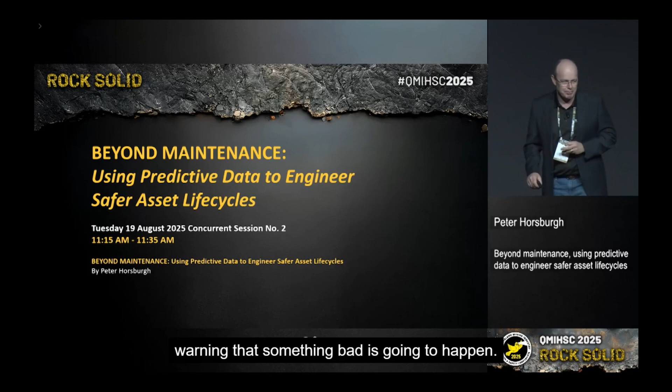So I want to introduce you to a future. In fact, this future is here now, and I've already chatted to a couple of people in the room. They've actually got the tools that I'm going to talk about here today. So imagine a future that gives you warning time. Warning that something bad is going to happen, okay? So

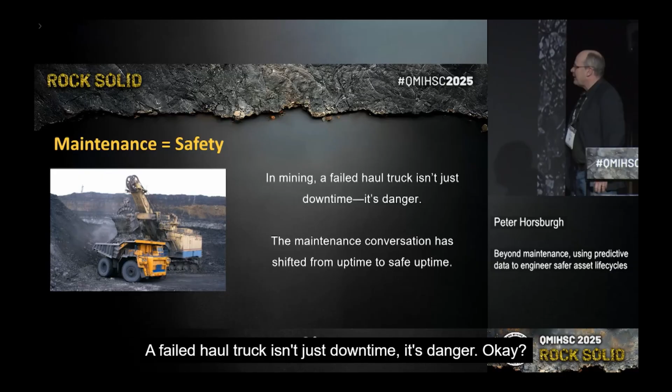maintenance is equal to safety in our language. Me being in reliability, there's certain things that can happen when things break that put our people at risk. A failed haul truck isn't just downtime, it's danger, okay? The maintenance conversation has shifted from uptime to safe uptime.

And I'm a big fan of Ron Moore. Does anyone know Ron Moore? Has anyone heard of Ron Moore? He's like an international speaker on reliability, okay? And Trevor mentioned my book there earlier.

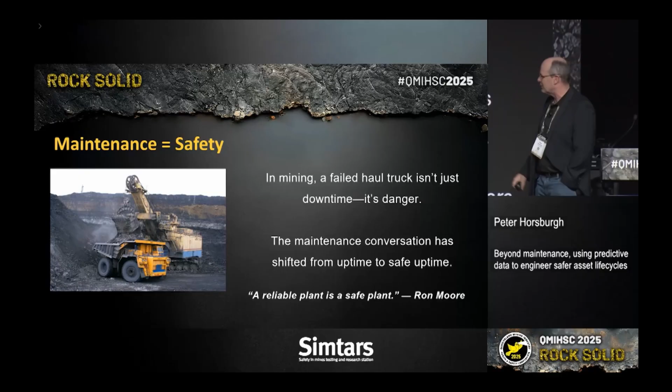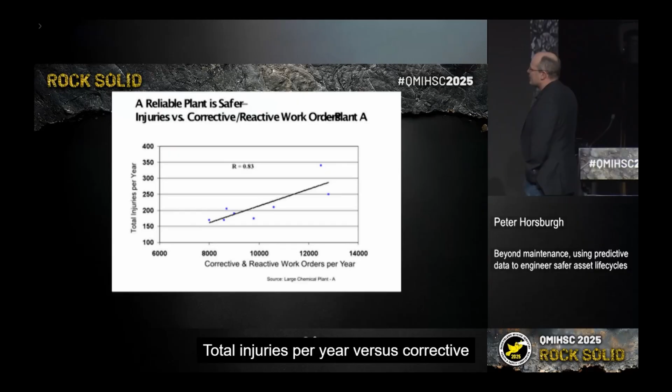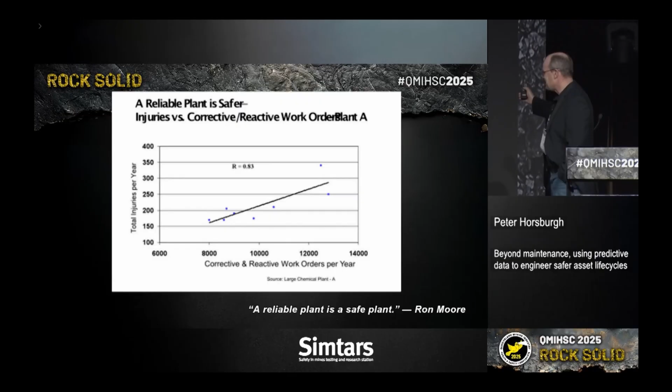A reliable plant is a safe plant, and he's actually done some data on this. Total injuries per year versus corrective and reactive work orders, okay? There is a 0.83 correlation between that. Okay, so if we get reliability and maintenance right, we're going to have a safer plant. There's the data to show it. A reliable plant is a safe plant.

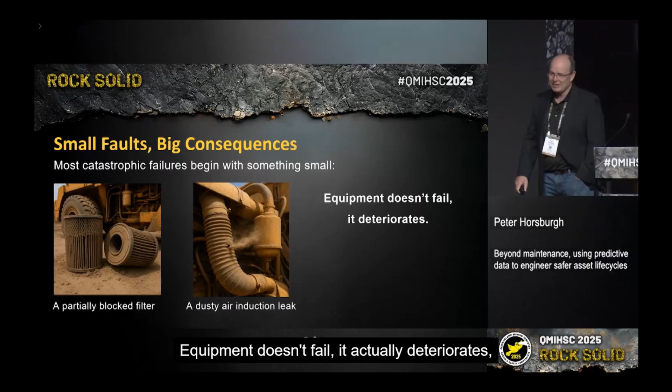Small faults, big consequences. Most catastrophic failures begin with something small. A partially blocked filter, a dusty air induction leak. Okay, take note of that. I'm going to talk about this in a little bit more detail in a second. Equipment doesn't fail, it actually deteriorates. It generally gives some symptoms, okay, some symptoms that it's going to fail.

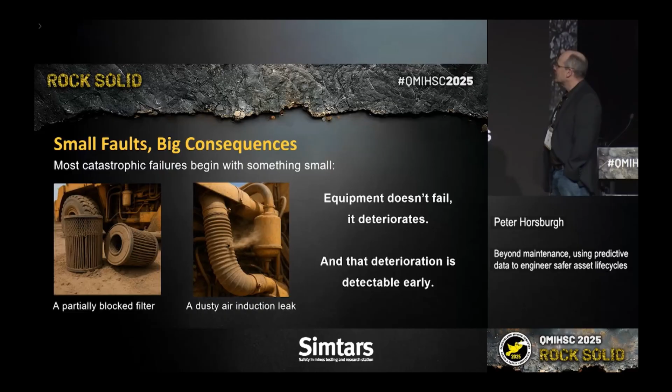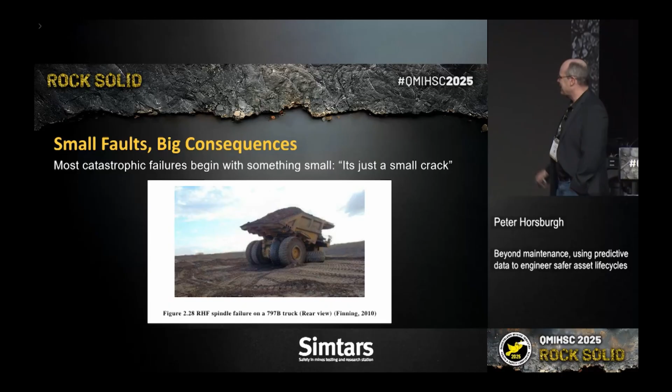This one here, I don't know if you know this one, but we had a right-hand side spindle failure on a Cat 797B. And again, it comes back to the point that most catastrophic failures begin with something small. It's just a small crack, okay? And it led to this here. True story, by the way. I found that in an academic paper.

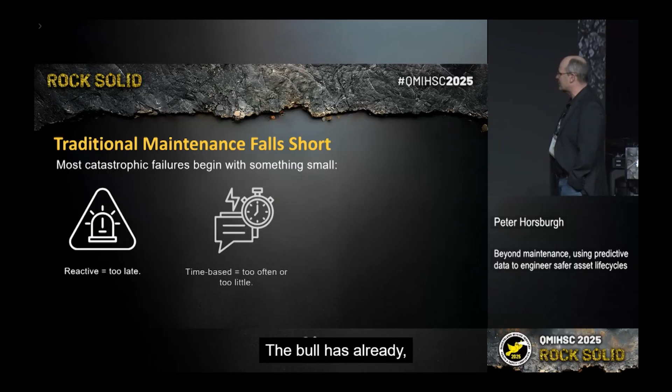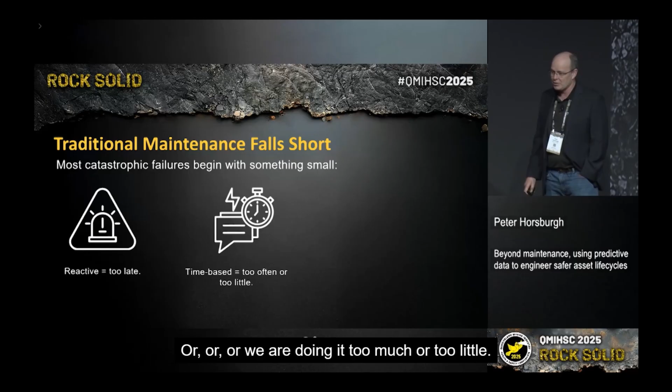Traditional maintenance falls short. Most catastrophic failures begin with something small. Reactive, it's too late. So if you're fixing the equipment on the run, you're too late. The bull has already broken the gates. Time-based is often too often, or we're doing it too much or too little. We miss stuff, okay? Both approaches miss the early warnings, okay?

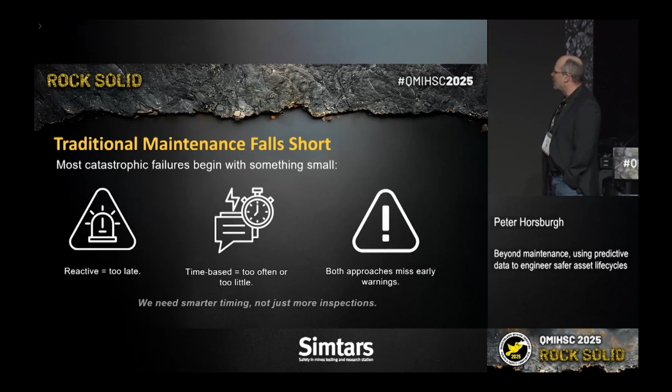And that's what this is all about, giving you good people time to react to a problem. Time to react to a problem. I think Maverick said time is your greatest enemy in Top Gun. So we want that time. We need something smarter and more than just inspections, okay?

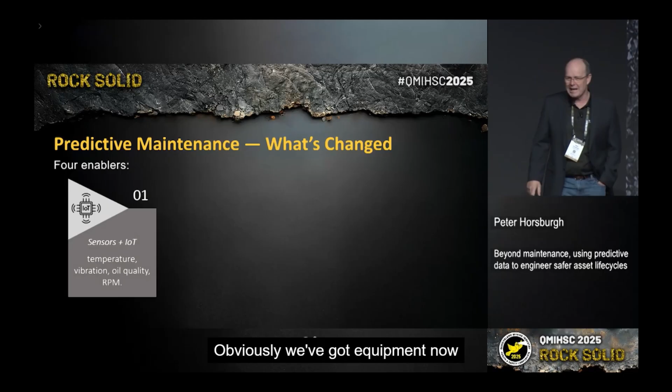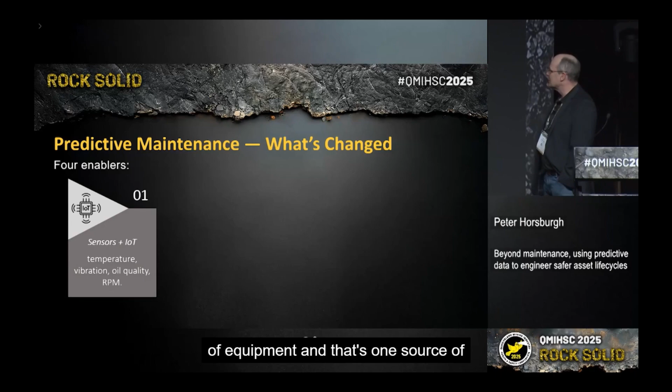So with predictive maintenance these days, what has changed? There's a few, let's call them buzz things, that I'm about to mention. Sensors and IoT: obviously we've got equipment now that is more electronic than it ever has been, okay? We can get all sorts of data off these pieces of equipment, and that's one source where we can get the symptoms from. Machine learning, which I'm going to talk about in more detail in this presentation, detects deviations from normal, okay?

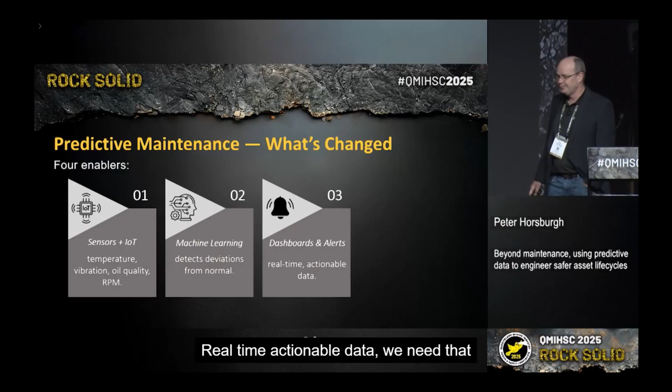Imagine training someone that sits there 24/7, 7 days a week, 365 days a year. You don't have to feed them. And they're constantly monitoring and looking for abnormal behaviour on your equipment. I'm going to give you some insights into how this actually works. Dashboards and alerts, okay, real-time, actionable data. We need that because we've got to do something about it.

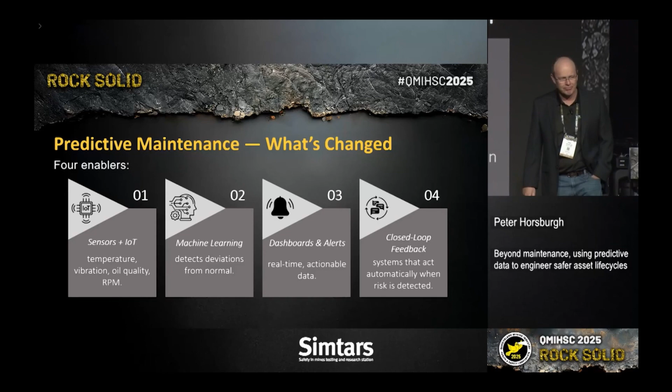And then closed-loop feedback. It says here, systems that automatically act when the risk is detected. And have we got some people around the world actually doing that? Yes, we do. Okay? So they're hooking up AI, and their AI is actually controlling their plant. Okay? Very interesting. How it actually works.

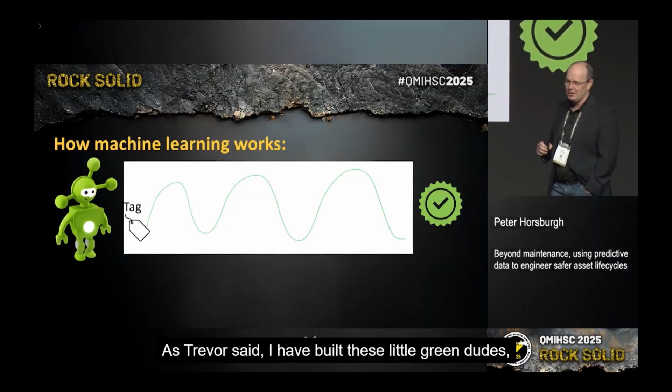I'm not a data scientist. I'm a reliability engineer, as Trevor said. I have built these little green dudes. These little green dudes with the antennas out of their heads are an algorithm. They're a mathematical algorithm, commonly known as machine learning. Okay? And what my little bot can do is take a tag. A tag is a data stream. He can take that tag and he can learn what normal looks like.

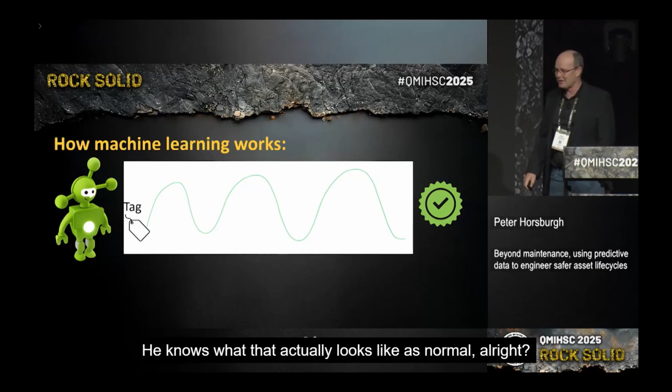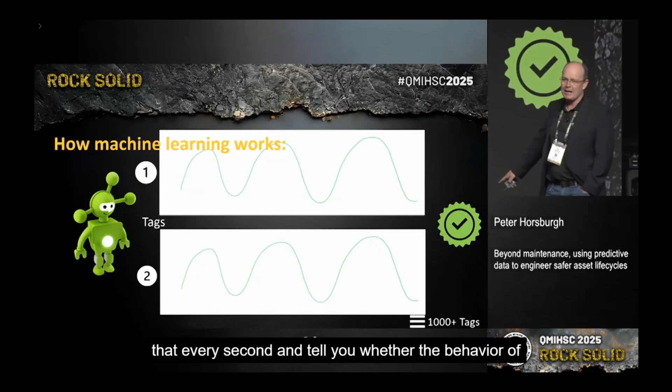You can see there he's got the little green tick. He knows what that actually looks like as normal. All right? Not only can he take one tag, he can take multiple at the same time, and he can actually take 1,000 plus tags. Okay, 1,000 plus data streams, do calculations on that every second and tell you whether the behaviour of that equipment is normal or abnormal.

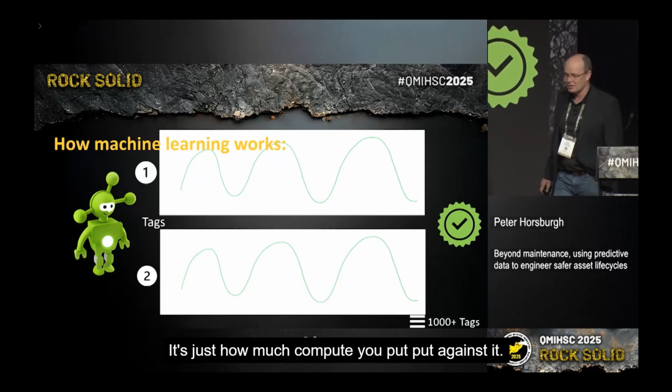1,000 plus tags. To my knowledge, there is no limitation. It's just how much compute you put against it, and the IT guys can sort that out. Okay? So, what he can also do is he can actually find where the

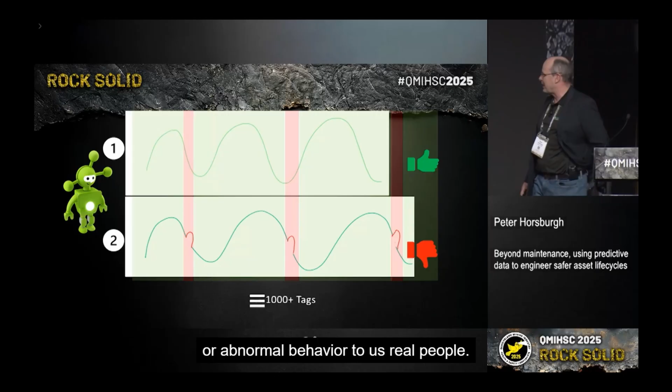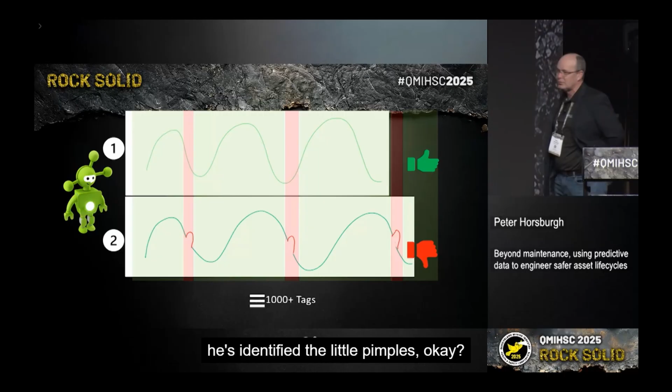behaviour deviates from normal, or what the IT people call anomalous behaviour, or abnormal behaviour to us real people. Okay? He can identify what is abnormal, and you can see there in the red shaded zones, he's identified the little pimples. Okay? And he can say tag number 2 is bad, and here's the areas where it is bad. He can do that on 1,000 plus tags every second.

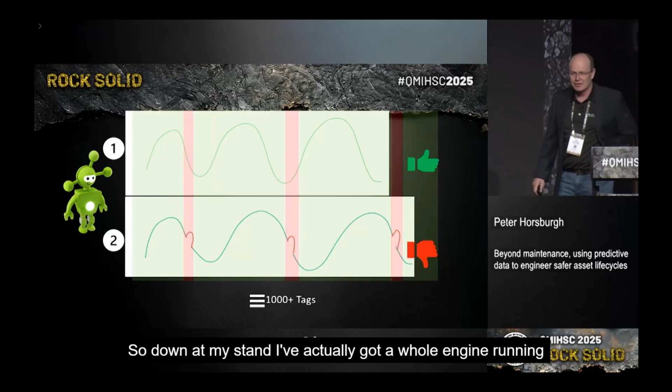Right? So we've got a lot of supervisory power. In fact, this little green dude, we actually call the supervisor. So down at my stand, I've actually got a whole engine running, and I've got a supervisor there monitoring an engine. Okay? And we can induce a fault and see what happens. Has everyone got that? Can I move on?

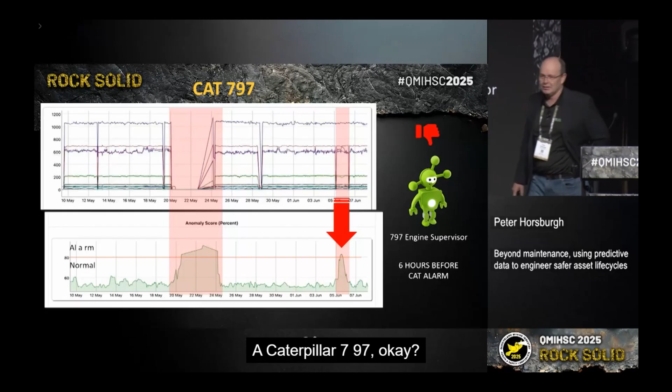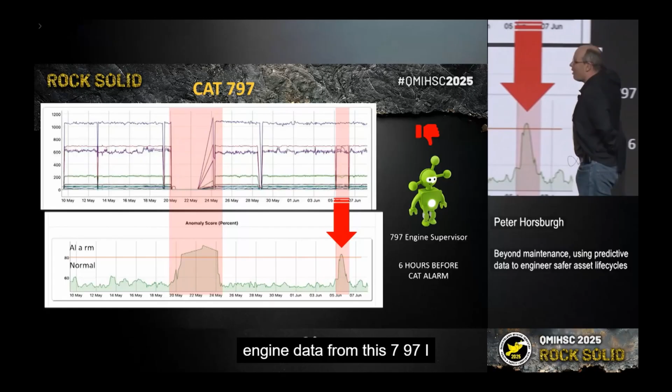Okay, I want to get to something real now. A Caterpillar 797, okay, one of the biggest Cat trucks that people make. And so what we did was we took some engine data from this 797. Not a data scientist, as the reliability engineer, I trained up my supervisor. Okay, I called him a 797 engine supervisor.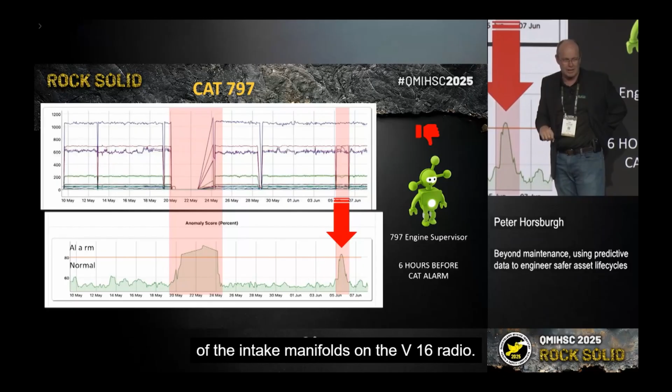Righto? Now, this particular truck had a loose hose clamp on the intake manifold, on one of the intake manifolds on the V16. Righto? It occurred where the big red arrow is. Now, I've highlighted two red zones here. One red zone is where they shut the machine down. And you can see here that my algorithm is saying that's abnormal behaviour compared to the rest.

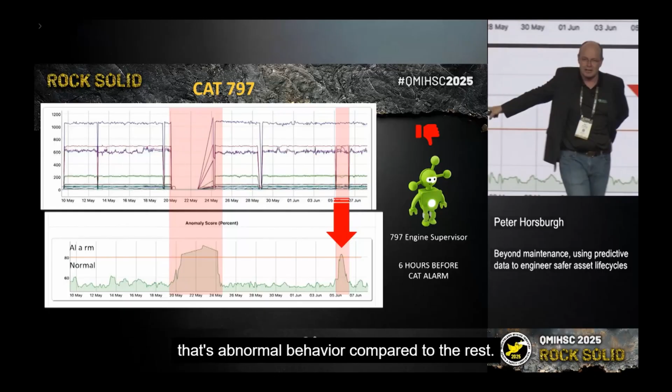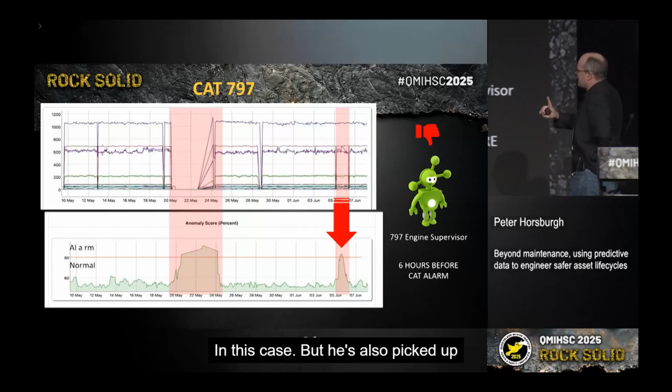It is, isn't it? Wouldn't you agree? Okay, so he's picking that up. That's abnormal behaviour, okay, in this case. But he's also picked up this little spiky bit here. That little spiky bit there is where they actually had an EGT alarm on the 5th of June at 5:15

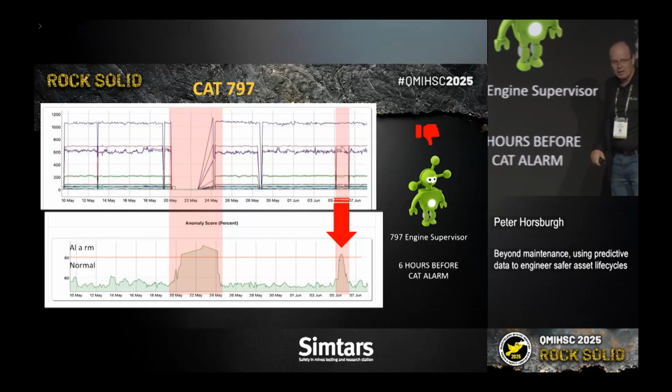in the afternoon. Truth be told, if this little guy was on the truck supervising this truck, he would have found that 6 hours before the actual Cat alarm. That's plenty of time to get in the spare. Okay, and we're not dealing with an EGT alarm in the middle of the pit mid-circuit during a production cycle.

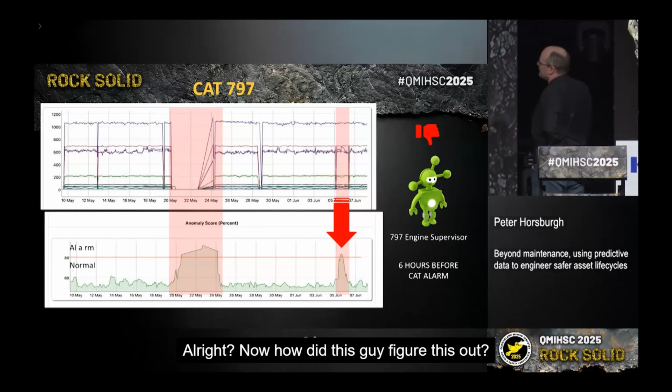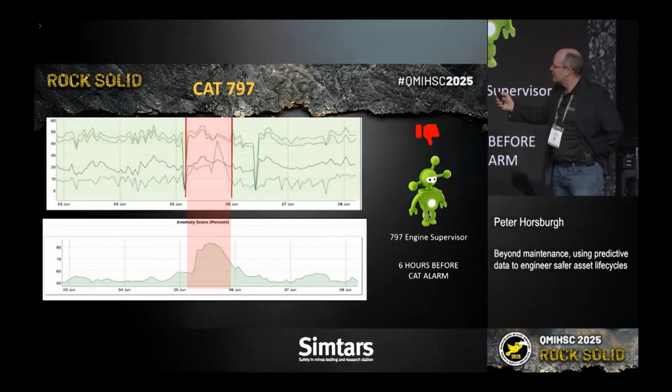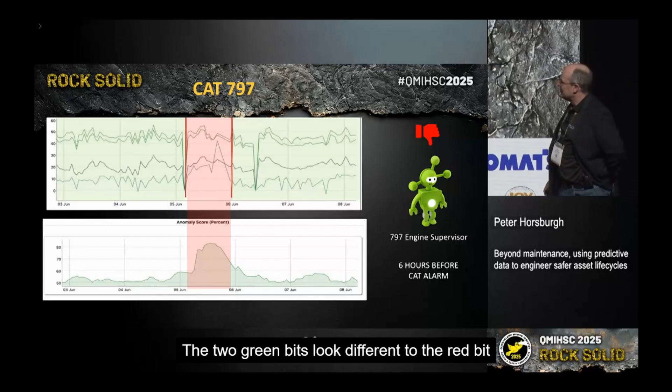All right? Now, how did this guy figure this out? Let's zoom in. I'll help if I press the right button. Let's zoom in and have a look at what he's actually seeing. So I've zoomed in here and we've got a green, a red and a green zone. Now, I'm sure as humans, you can see the difference in the pattern in the data. The 2 green bits look different to the red bit, and that's what our algorithm is picking up on.

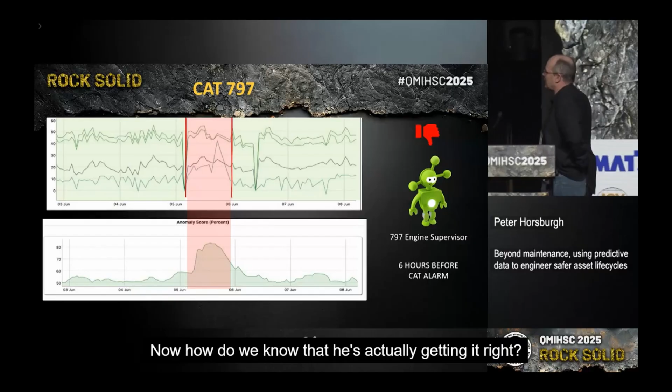Okay? And if you have a look at the time scale there, you can see where the 6 hours has actually come in. So he's actually predicting this alarm 6 hours before. Now, how do we know that he's actually getting it right? Because he actually tells us. And hopefully you good people can see this.

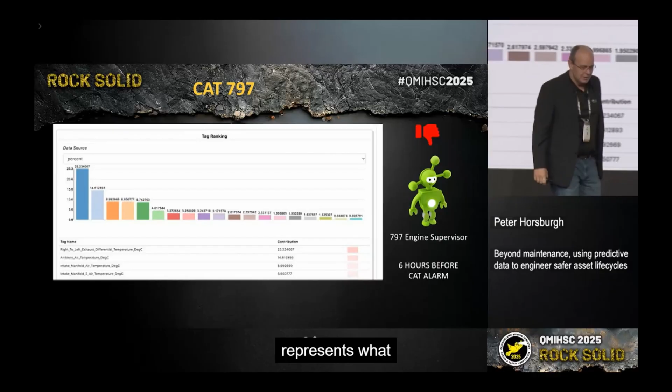The big blue bar represents what is behaving the most differently, and if you read the top line there, it's the right to left exhaust gas differential temperature. So our little bot is telling us 6 hours beforehand that you're going to have an EGT alarm. Okay? That's how this technology works.

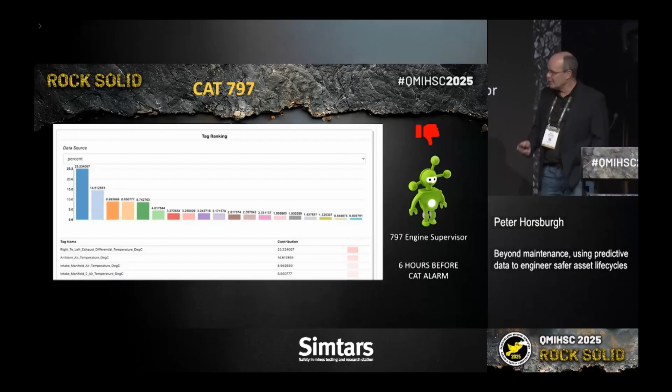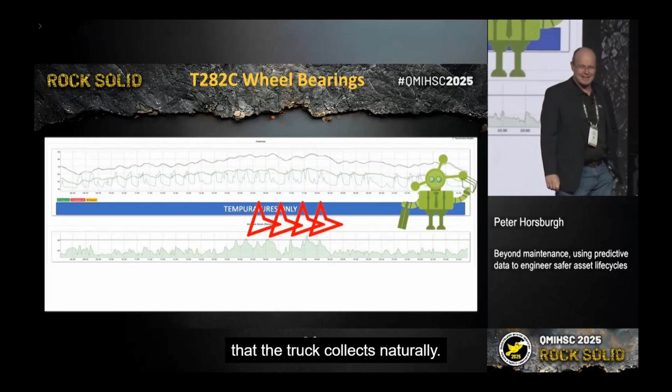Now, where else has it been applied? That's one that I did. Here's some stuff that other people have done. These are on 282s, and you'll see here before, during, and after. And that is just using data that the truck collects naturally. There are no extra sensors or anything like that on the 282.

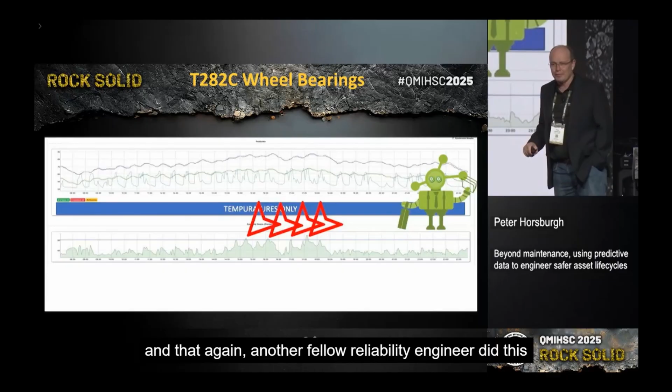And the person that did this, another fellow reliability engineer, did this with no code, and he was smart enough to actually train our little bot on the ambient air temperature. Okay, so we combined the ambient air temperature with the bearing temperatures, and what the bot picked up on was the subtle rise in temperature of these wheel bearings.

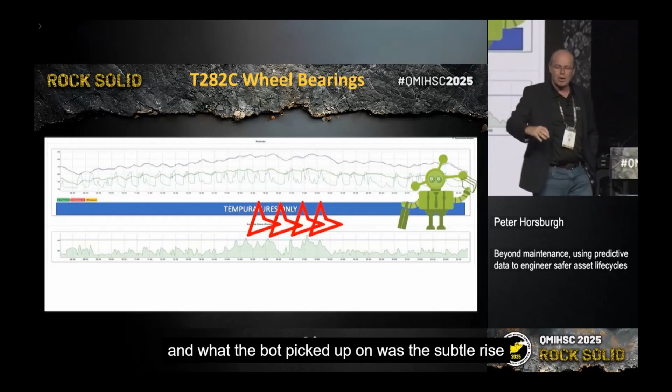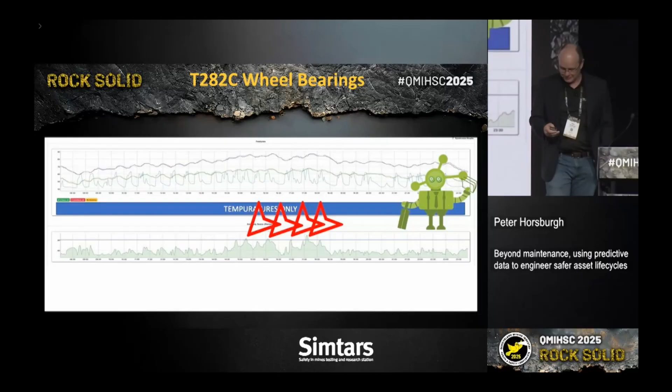Now, how do we know that the bot got it right? Because they pulled the machine apart and found that the bearings were actually well and truly failed. Okay? And then they put the machine back together, started running again, and our bot says it's all gone back to normal. Okay? Everyone see that? Cool, cool.

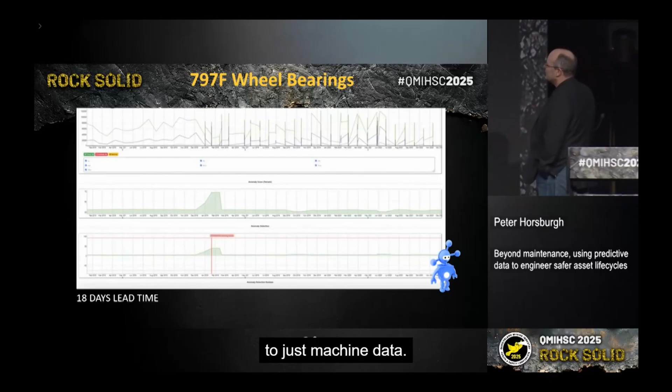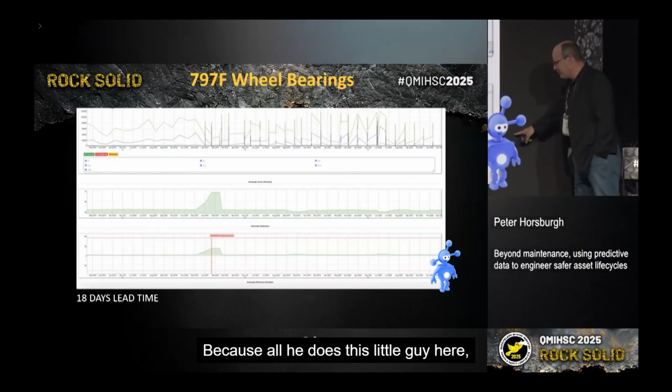These guys are not limited to just machine data. This again is on 797s, and we've got our little blue dude. I'll explain the little blue dude here in a second. He is called the lackey, all right? Because all this little guy does is identify wheel bearing failures on 797s from oil samples.

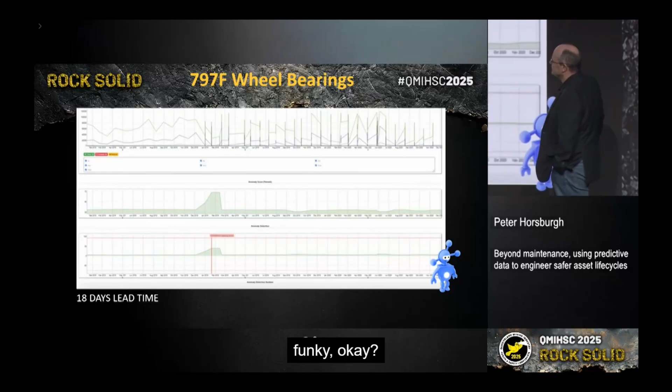So that's why that data up the top there looks a little bit funky, okay? You can see his response here. The difference between the supervisor and the lackey is that you've got to tell him when the failure has occurred, okay? So some people call it a failure mode. So you train him specifically on this failure mode.

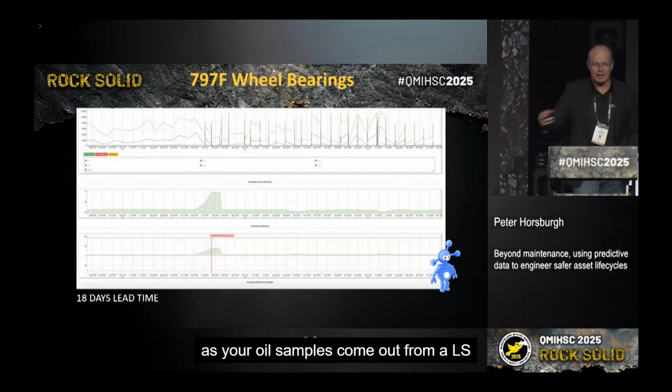So what this little guy does is as soon as your oil samples come out from ALS or whoever your service provider is, he reads that data and he assesses whether you've got an impending wheel bearing failure on a 797. Now, I'm told that detecting wheel bearing failures on a 797 is quite an art, and that's why the site trained this guy up, okay? So we call him the lackey. He only looks for one thing.

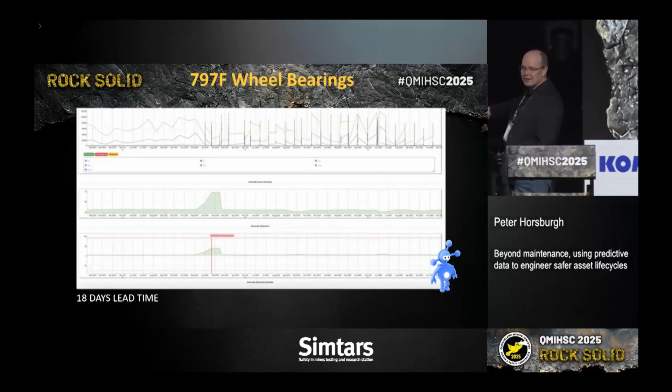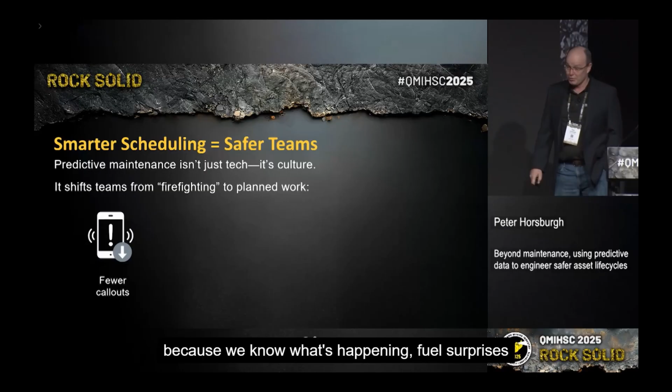Cool? All right. So having 18 days of lead time from our lackey: smarter scheduling, safer teams, and dare I say it, we can also have more available equipment. It's not just tech, it's a culture. It shifts teams from firefighting to planned work. So we have fewer call-outs because we know what's happening, fewer surprises, and fewer high-risk, high-stress repairs.

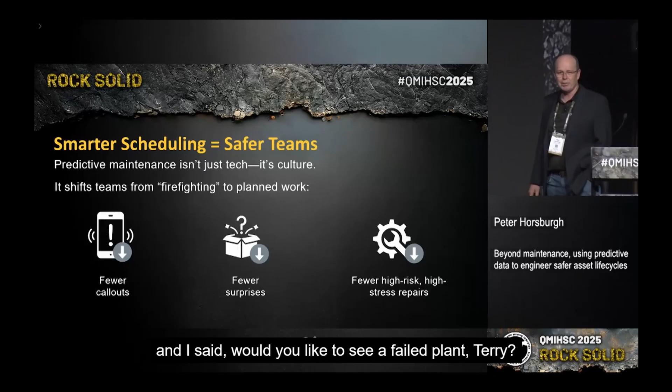I've been there in my corporate life as a corporate reliability engineer. I had a CEO one time come down and I was a maintenance manager, and I said, "Would you like to see a failed plant, Terry?" And he said, "Peter, I trust you have it under control." And I went, "Oh shit." Okay? So I've been there in the high-risk, high-stress repairs, and having these guys at the time, the supervisor and the lackey, would have helped me out in that case.

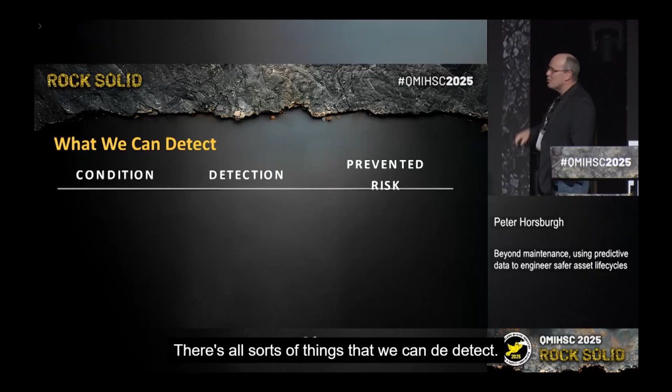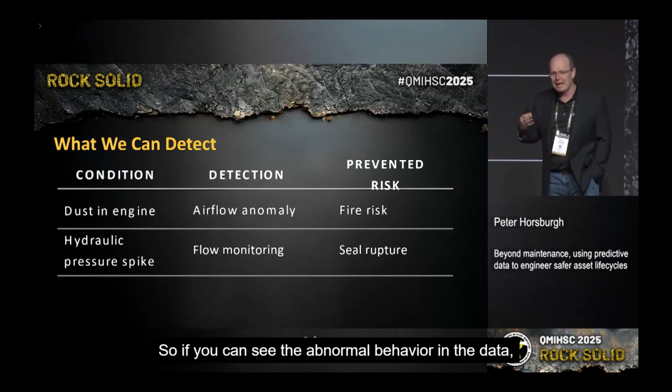All right, what can we detect? There's all sorts of things that we can detect. The key point here is that we actually have the data to do it. So if you can see the abnormal behaviour in the data, these guys can actually find it. So dust in the engine, airflow, hydraulic spikes, flow monitoring on your diggers, chassis fatigue, strut pressures. If you come and see me, I've actually got a strut pressure one running live down at the stand, so I can show you that if you're interested.

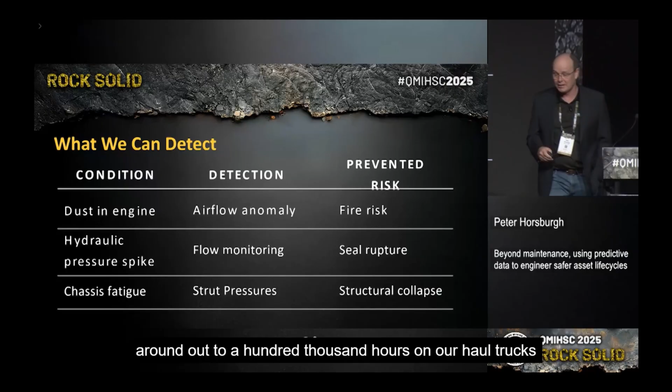And I know that chassis life is a conversation that people are having, and we're trying to push chassis lives out to 100,000 hours on our haul trucks, and people are not succeeding in doing that.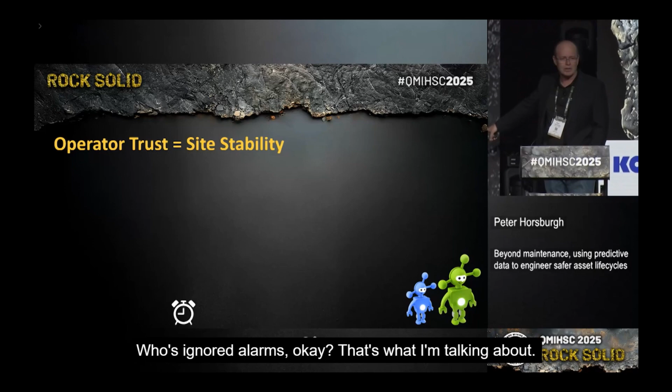Okay? Now, operator trust. Our operators and our maintainers have to trust what these guys are saying. Otherwise it doesn't work. Who's ignored alarms? Okay, that's what I'm talking about. These guys have a method of communicating.

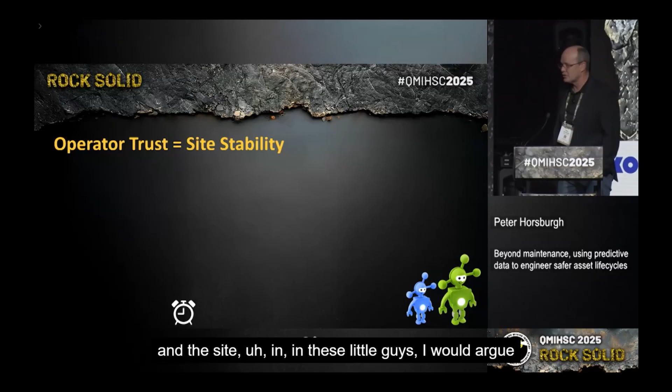Alarms is one method. Now, to build that operator trust in these little guys, I would argue that if you want these guys to overlook your machines, your site guys should actually build them yourselves. You do not need to be a coder, and I can show you how to do that. Visit me down at the stand and we'll build one together. Okay?

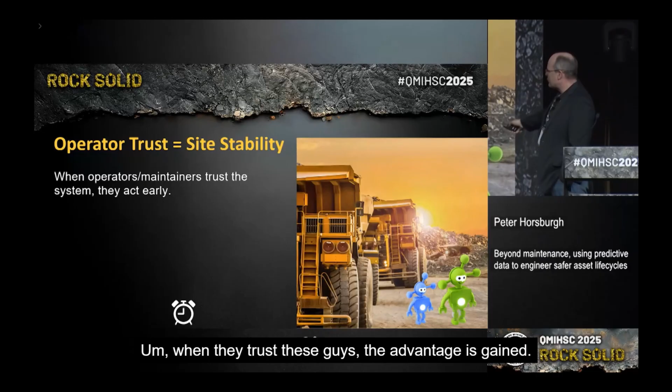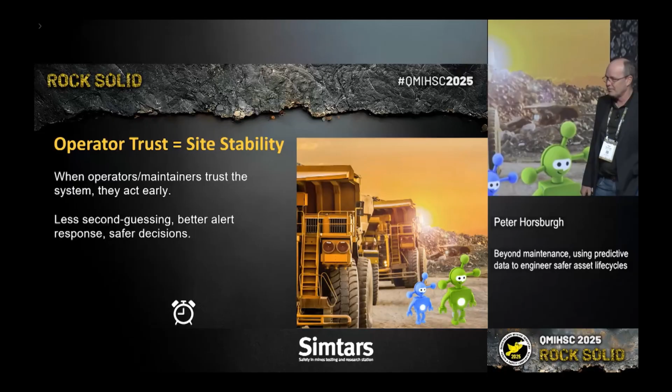When they trust these guys, the advantage is gained. They can act early. If they've built them, they trust them, and they move forward on what they recommend, and they can see what's simply going on. There's less second guessing, better alert response and safer decisions. As I said, the supervisor earlier gave you 6 hours warning. We can make a safer decision on site as a result of this.

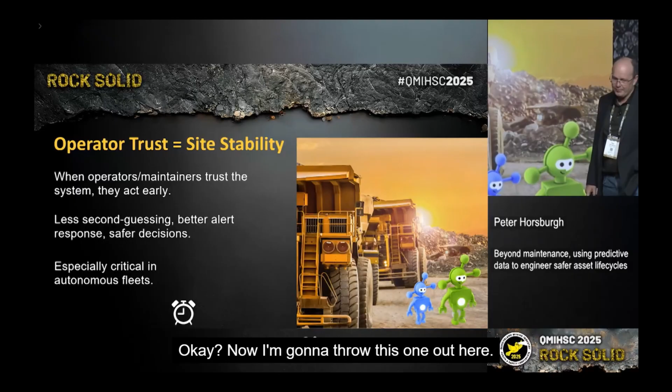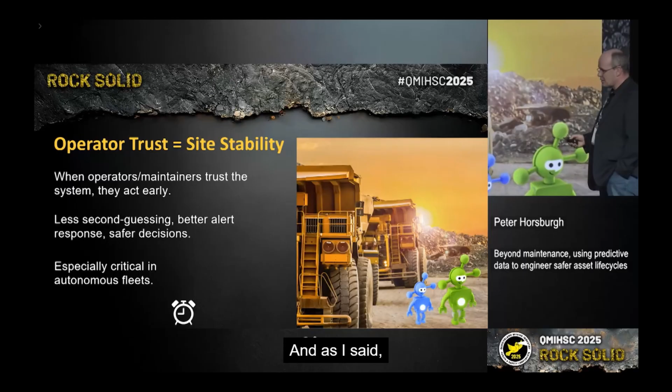Now, I'm going to throw this one out here. It might be a little bit controversial in Queensland and New South Wales as well: especially critical in autonomous fleets. No humans on your haul trucks. No humans to listen for the squeak, the bang, the rattle, the knock. These guys can see that. And as I said, these little guys are DIY, you do it yourself in 15 minutes. The little green guy is literally 15 minutes to build in 4 clicks.

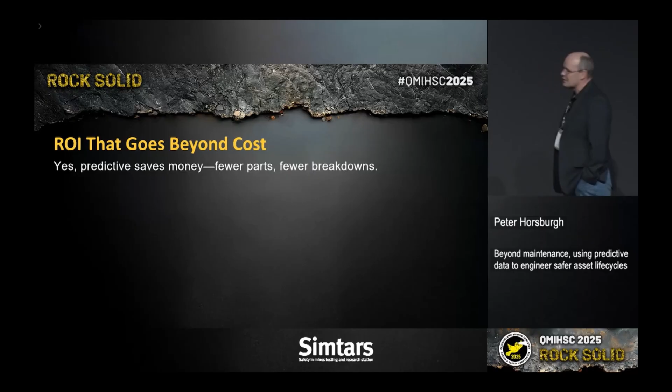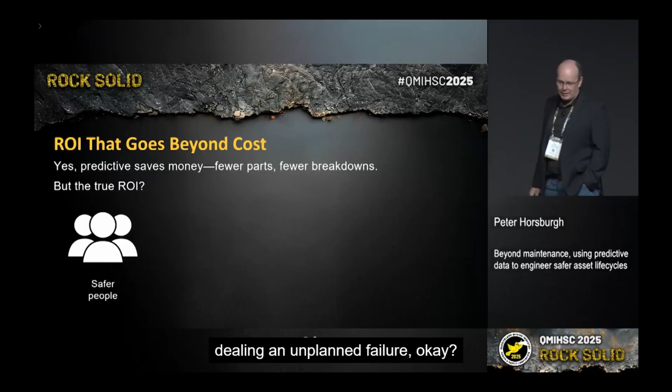All right? So return on investment that goes beyond cost. Yes, predictive stuff saves you money, fewer parts, fewer breakdowns, etc., because you've got the heads up. Well, what's the true ROI? Obviously safer people, because we're not putting them at risk dealing with unplanned failure. We have more predictable operations. We can schedule stuff in. And dare I say it, less fatigue and higher morale because we're in control.

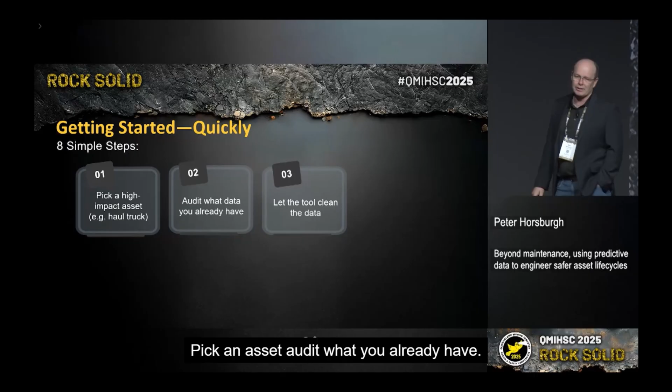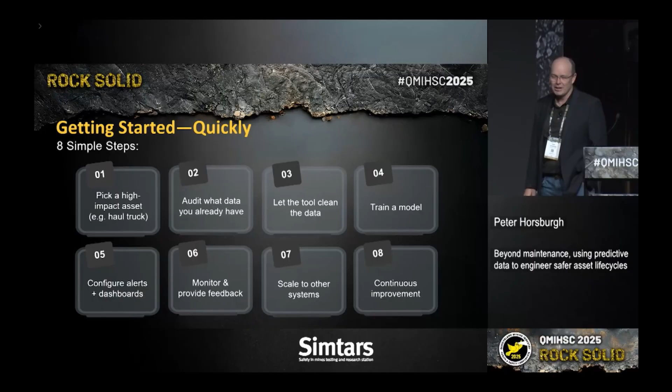How to get started with this stuff? It's 8 simple steps. Pick an asset, audit what you already have, let the tool clean the data, train a model in 15 minutes, configure your dashboards, monitor feedback, scale to other systems, and then most importantly, continuously improve. Again, you're in control of the little green and the blue dudes. You can make them better. As you learn, they learn because you are in control of them.

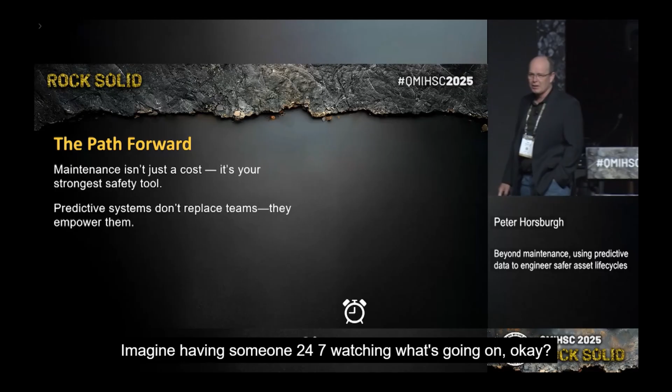All right? So maintenance isn't just a cost, it's one of your strongest safety tools. Predictive systems do not replace teams, they empower them. Imagine having someone 24/7 watching what's going on. With bots, safe, intelligent maintenance is operational today, not an aspirational tomorrow. I can show you today, down at the stand, how these guys work.